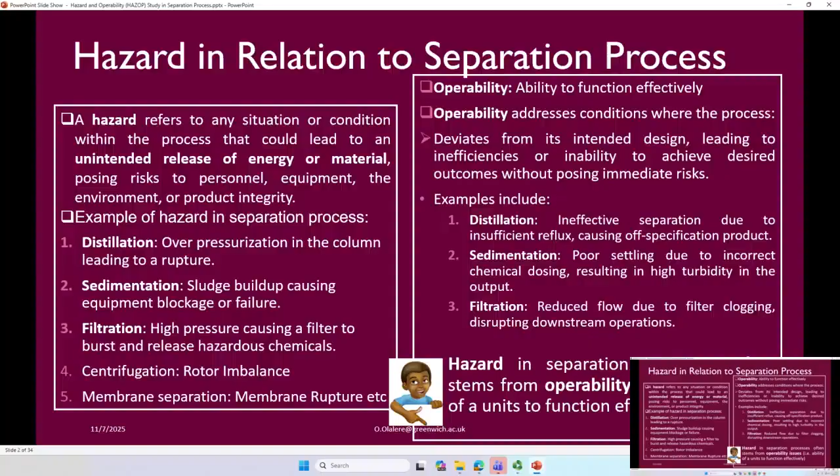Wait. Most of those things we buy, do you know the reason why they always have a manual? They will tell you, don't expose this to sunlight.

So most times, operability has to do with something that is embedded in our design. So by the time you are designing a sedimentation unit, you need to tell me what are the potential operability issues that will happen in your design.

And how can you prevent that issue from happening? So for us to prevent any hazard from happening, the first thing we need to take into consideration is to attack the operability issue first. And that is where prevention is better than cure comes in.

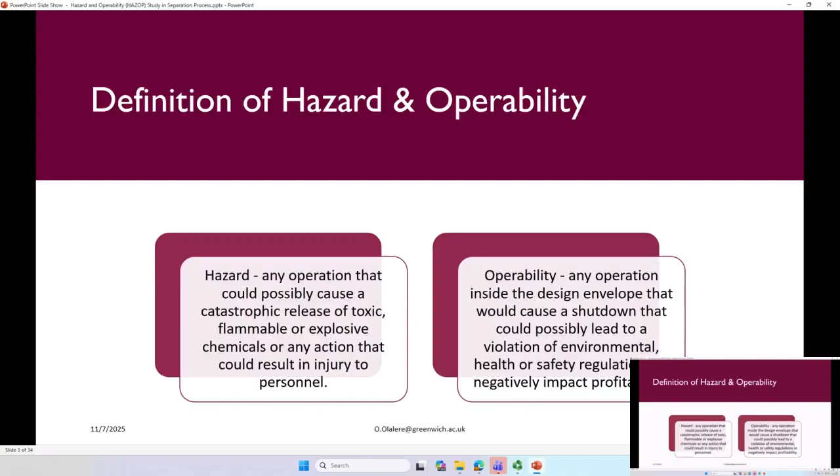You have a manual, right? And the manual tells you, don't exceed this temperature. Or in road safety, they will tell you, don't exceed, if you're on the highway, I think the highest speed is, I think 70, is it 70? Yeah, or 70 miles. Is it 70 kilometers per hour? I can't remember, 70 miles. But if it is the normal road, it's 60, right? No, except if they put 40, 20, at least 60.

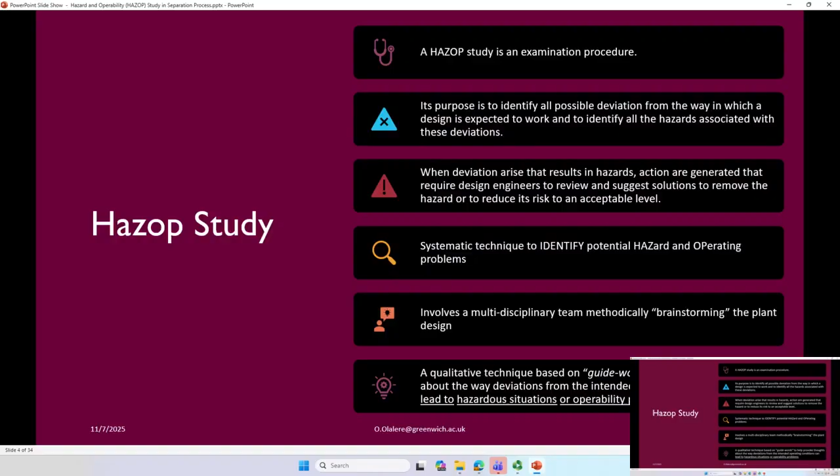Susaya, what happened? Did your salary enter? You're most cheerful today, or are you watching a movie? Don't tell me that's the reason why you're laughing. No. Okay, don't worry, I hope to see you laugh during the exam.

So now, what you're saying in essence is that we can conduct a Hazop study during the design or installation of any new plant. Like now, we are designing different equipment, right? So this is when you can use a Hazop study. So under your environmental and sustainability work, you will add Hazop study to it. Don't worry, I'll tell you how to do it, it's very simple.

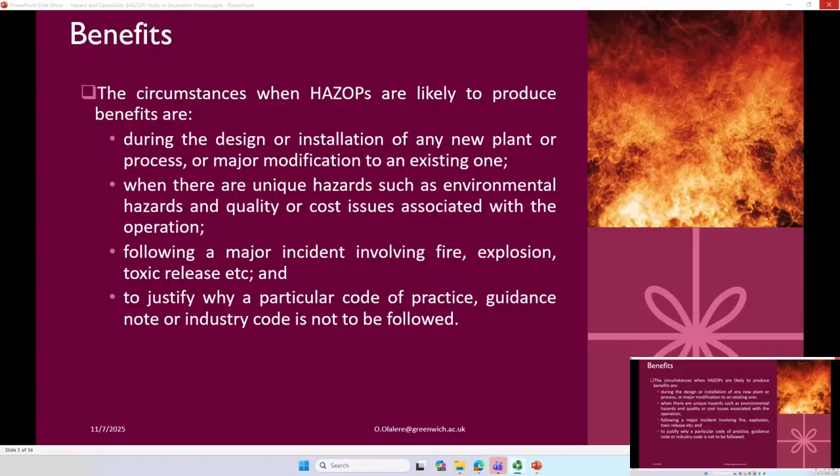So a Hazop study is most useful if we're able to identify operability problems. It's more or less like, okay, if I do this, this is what will happen. It hasn't happened yet, right? If I don't read my book, this is what will happen. If I delay in applying for my visa, I will overstay.

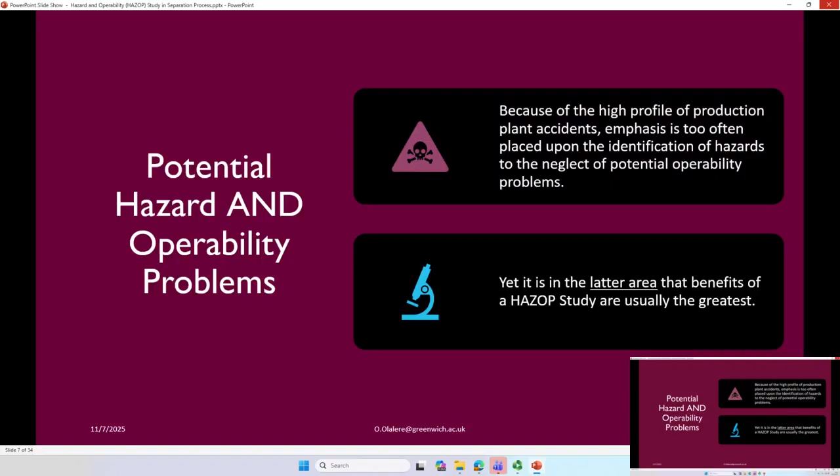So that's an operability problem. If I switch on this, what will happen? The pressure will increase. And if the pressure increases, maybe my filtration system's filter will break. And if the filter breaks, what happens? It's possible we have a release of toxic materials, and maybe a cost issue too.

So when should a Hazop be held? I think I mentioned that. Now we have different terminologies. Please, this is very important. If you are a safety officer, you need to know all of this. Not many people know this, but if you're a safety officer, you need to know it.

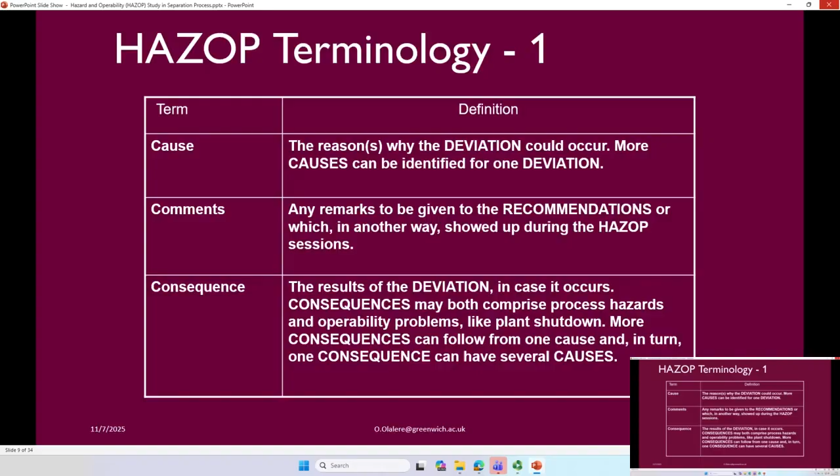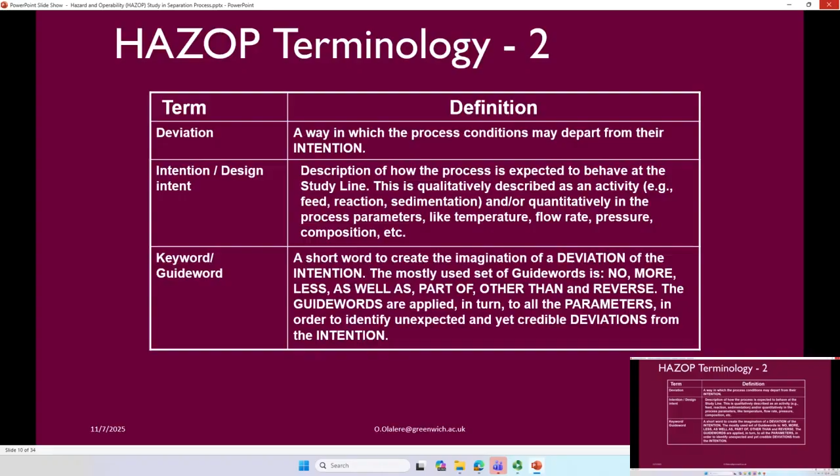Then we have parameters, the relevant parameters for the condition of the process, like temperature and so on. We have study line or node, a specific location in the process where a deviation occurs. So if the deviation occurs in, say, a separation unit, we call it the node. They may ask, can you show me the node? The node is that place where the accident occurred. Then recommendation: activities identified during the Hazop study for follow-up.

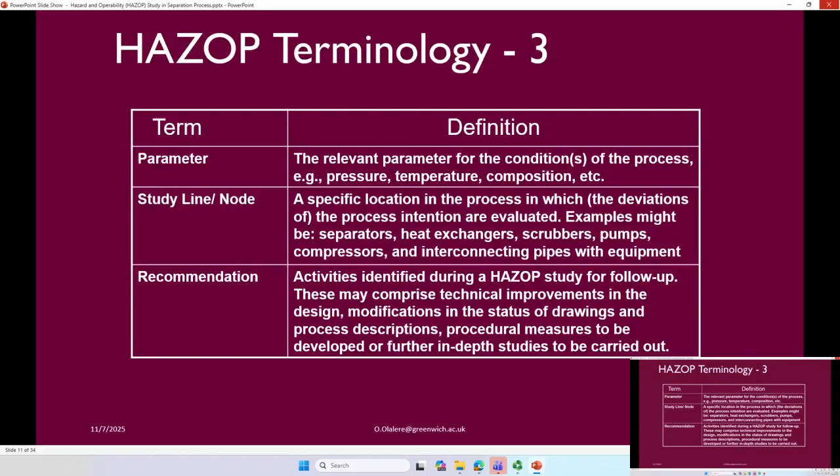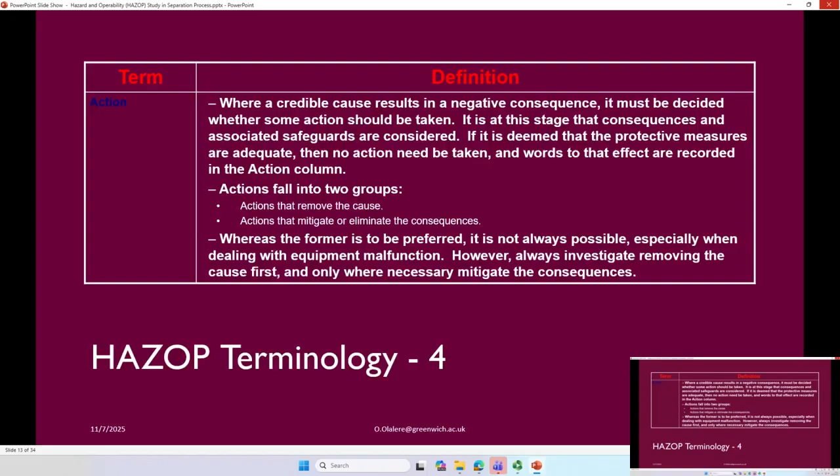Safeguard is what helps to reduce the occurrence. The action is where a credible cause results in a negative consequence, and it must be decided whether some action should be taken. So that is Hazop terminology.

Now, in any Hazop study, these are the major contents. You may not appreciate all this now until you get into it. Do you have any safety officer here? Mukunda?

I think you've done something on this before? Safety officer, I did an HSC course. HSC. Did you do anything like a Hazop study? Yeah.

Jyoti, did you do anything like this? I used to be a safety officer. Okay, did you do a Hazop study? Yes, we used to do a Hazop study, material safety and design safety. She has a certificate, right? You have certification too? No. Messiah?

I think you understand it more because you've done this before, but I'm just giving you a generic Hazop study. There are different Hazop studies specific for different issues. For example, we'll do different examples in this class together, and you'll see how we can use Hazop study in separation units.

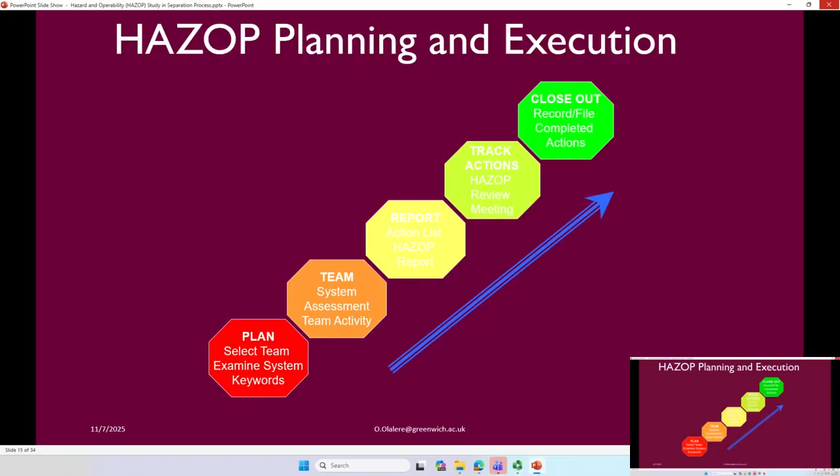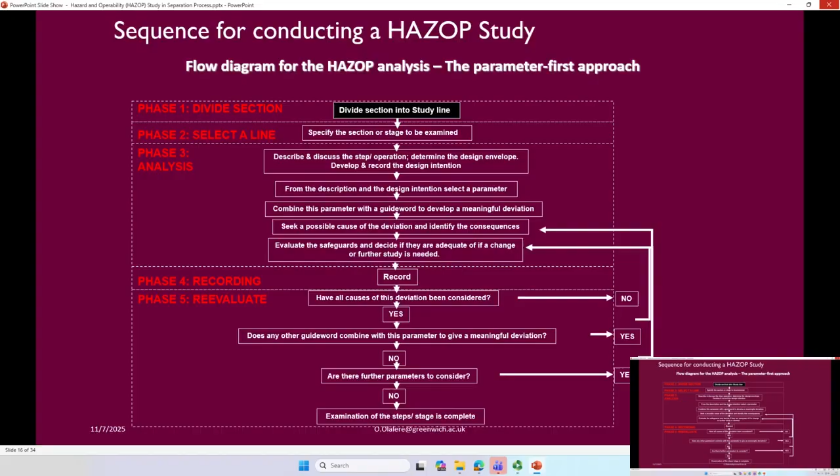So now the first stage is planning. Second is team, report, track action, and closeout. These are different stages. Now, the sequence for conducting a Hazop study - this is just a sequence, you don't need to cram it: divide into sections, select a line, analysis, recording, reevaluate.

Then, how to perform Hazop on a provided example. The first step is to prepare for the Hazop - don't worry, we'll do one or two examples on this. Include the process engineer, safety specialists, and so on. Then collect the P&ID or process diagram, equipment, data sheet, and so on.

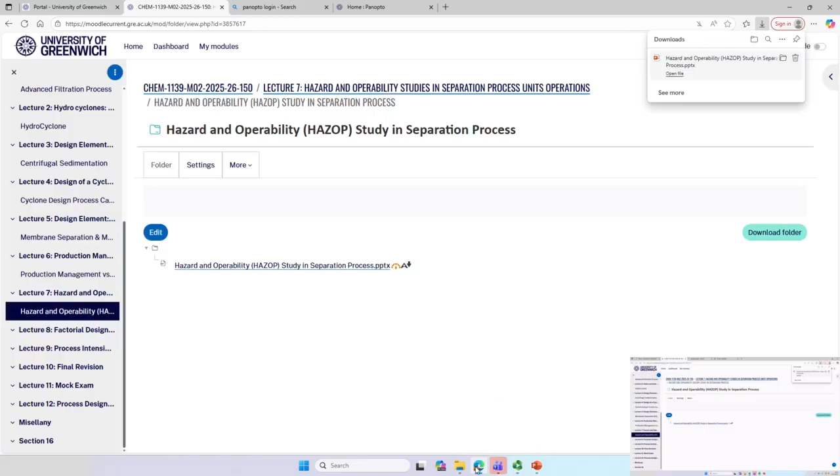Listen, I only ask you to design a process, Jyoti. I only ask you to design a project in which a particular separation unit is being used. Okay, take for instance, let me re-explain. Please listen. So look at this. What's wrong with you? Now look at this cyclone, for example.

You have been tasked to design an industrial scale air cleaning system for a cement manufacturing plant. So this is a process, you understand? But the calculation I want to see is your design calculation, based on that separation unit we do in class - like mass balance. The mass balance will be based on that separation unit. For example, for design of centrifugal sedimentation, the calculation will be based on centrifugal sedimentation.

But don't forget, a pump will be there, maybe pumping into this, and the rest like that. There may be a storage unit - that one I don't need the calculation for. So I only need the calculation for everything that is entering that separation unit. It's a process I want you to design, but you are trying to amplify that particular separation unit.

Not just that you give me this and say, okay, I design this - no. What are the other processes involved? Because they will challenge you when you are presenting this. I'll be looking at you and smiling.

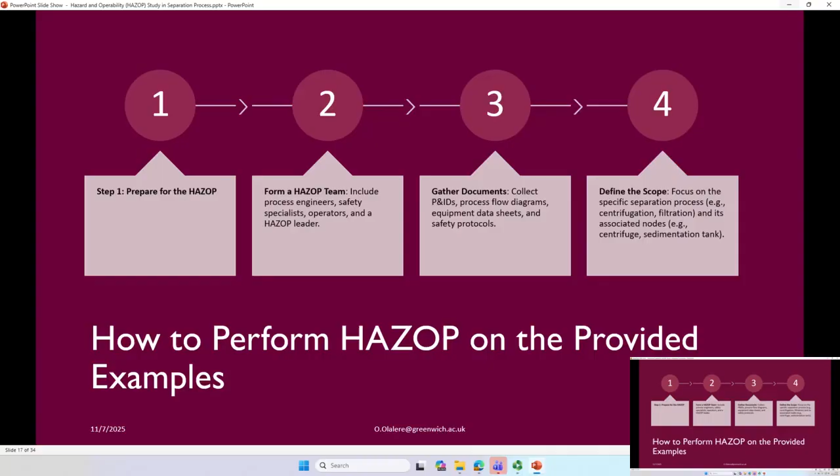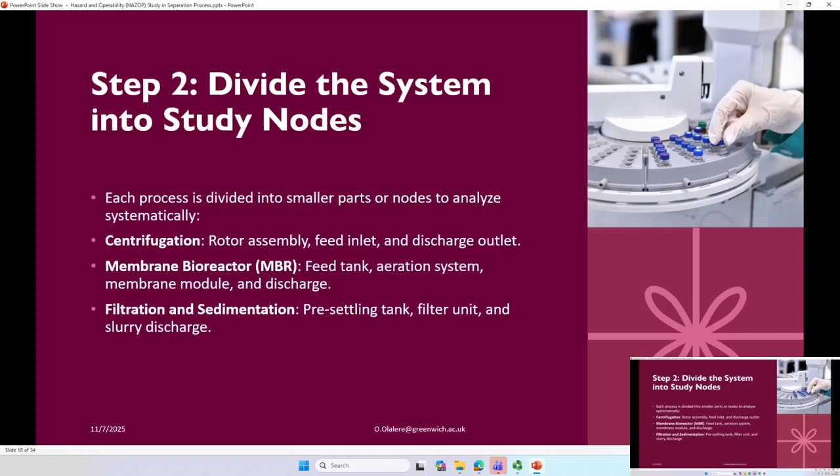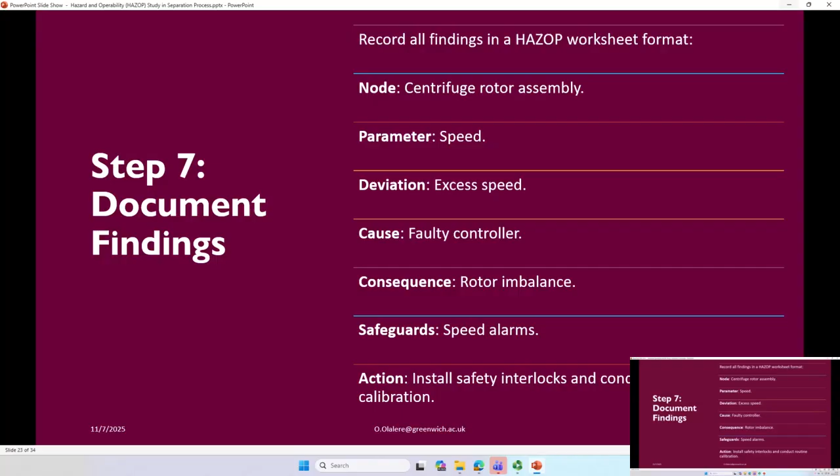So now, how to conduct or perform Hazop? Please listen, you can finish your group meetings after. So how to perform Hazop on a provided example? The first step is prepare for the Hazop, and so on. The second is divide the system into study nodes—each process is divided into smaller parts or nodes to analyze them systematically. Then centrifugation, like rotor and so on—don't worry, we have an example here. Then apply guide words, these are different guide words, and identify safeguards. The last step is recommend actions, then document findings, follow up implementation. Now let's look at this.

A chemical processing plant uses a reactor to produce a product by mixing two reactants A and B. This is—what's the name? It's an exam, a possible exam question. So the class is quiet now. A chemical processing plant uses a reactor to produce a product by mixing two reactants A and B. The plant has reported an incident where the reactor temperature rose significantly above the design limit, leading to an emergency shutdown.

So this Hazop study is after an incident occurred, right? During the investigation, it was discovered that the temperature control system failed, and there was no adequate backup system in place. This posed a risk of thermal runaway reactions, potentially causing an explosion. So you are being asked to conduct a hazard and operability study on the reactor operation to identify potential hazards and suggest suitable solutions. First, conduct a Hazop analysis for the following parameters: temperature, flow, and pressure. Second, propose one preventive measure and one mitigative measure for the identified hazard.

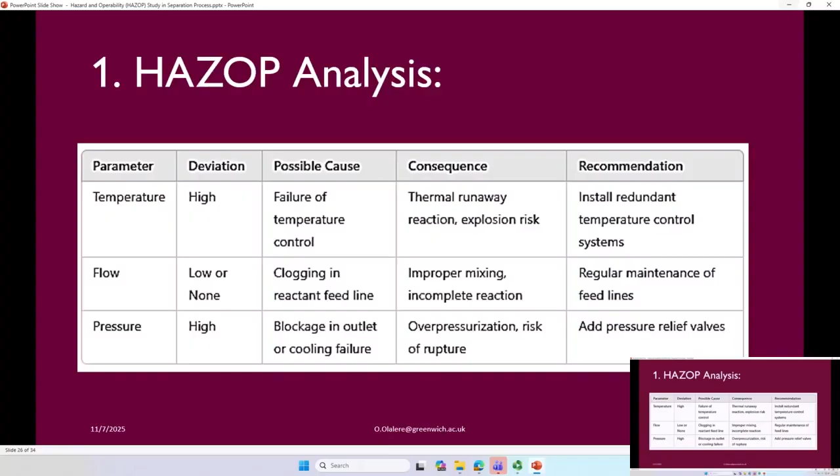Now, the second question says, propose one preventive measure and one mitigative measure for the identified hazard. Preventive measure, very simple, we are repeating it. Install a redundant or independent temperature control system to ensure continuous control. Even if one fails, you have a backup on the redundant one.

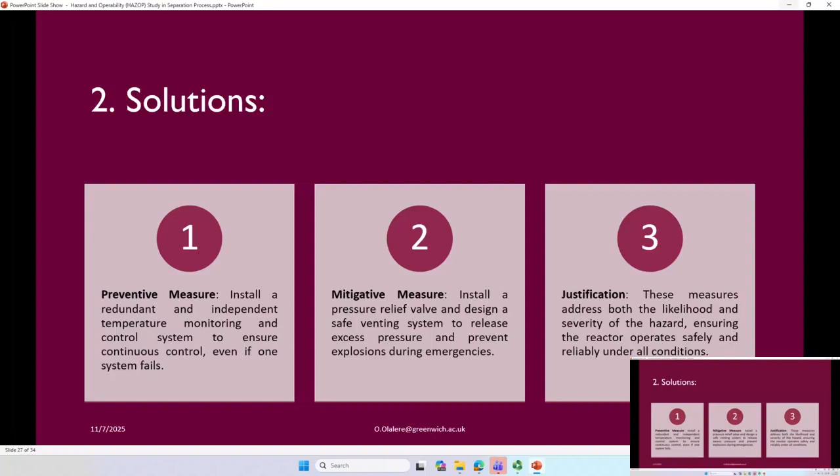Then the mitigative measure: install a pressure relief and design a safe venting system to release excess pressure and prevent explosions during emergencies. And what is the justification? This measure will address both the likelihood and the severity of the hazard, and it will ensure the reactor operates safely and reliably under all conditions. That's it about that question. The second question: a water treatment plant with a chlorine dosing system to disinfect water.

During an operational review, it was found that excessive chlorine was occasionally being dosed into the water due to pump calibration errors, posing risk to downstream users. The Hazop study is required to analyze the system and propose solutions to prevent such occurrence. Now, perform hazard analysis for these parameters: flow, concentration, and pressure.

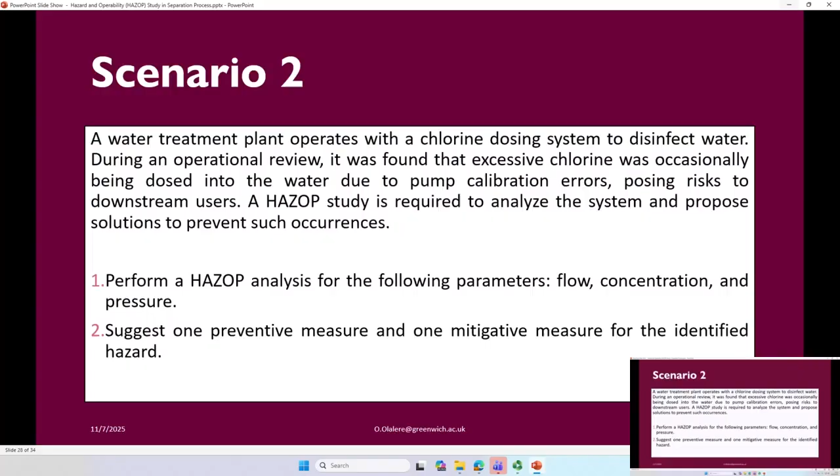Then the same question. So the only thing that will happen is that we can have different scenarios, but it's the same thing. So if the flow is high, just as the one we had the other time, pump over calibration, excessive chlorine dosage, all those things are inside the question, right? Then the recommendation is from you now. So all this, you can actually get inside the question, right? The only thing you are adding to it is what? A recommendation. It's very simple.

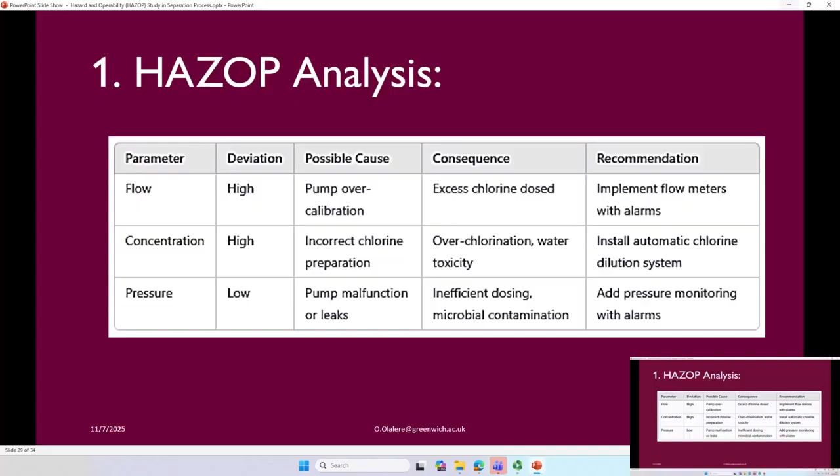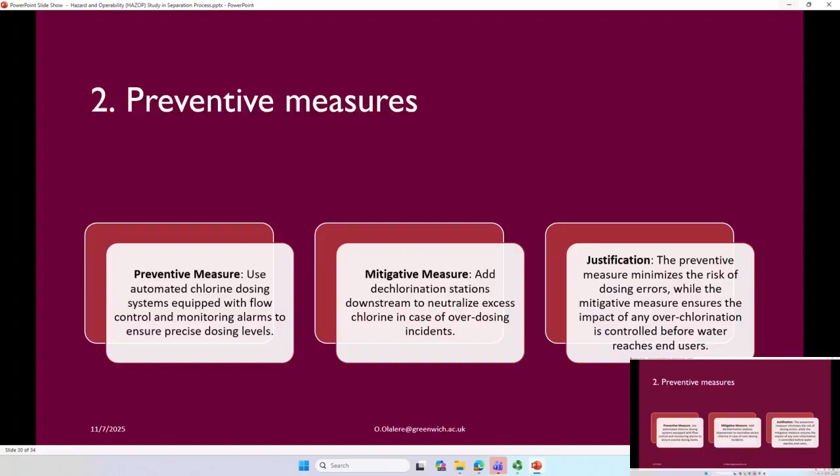Preventive measure: you can use an automated chlorine dosing system equipped with flow control and so on and so forth. The mitigative measure: add dechlorination stations downstream to neutralize excess what? Excess chlorine. And then justification, preventive measure and so on. So that's it about that. Can someone do this for us? Can someone do this for us?

Conduct Hazop analysis for the following parameters. Harris, read for us. A petrochemical plant operates a distillation column to separate a mixture of hydrocarbons into light and heavy fractions. During routine operations, the plant experienced an unexpected increase in pressure within the distillation column. This led to the activation of the emergency pressure relief system, which vented valuable hydrocarbons and posed a safety risk. A Hazop study is required to analyze the process and propose measures to prevent such incidents.

Now, conduct a Hazop analysis for the following parameters: pressure, temperature, and level, and propose one preventive measure and one mitigative measure for the identified hazard. Solve it, Ali. Ali? It's your turn. So in this scenario, the pressure went too high, due to which the emergency pressure relief system activates. So temperature also gets high, and level.

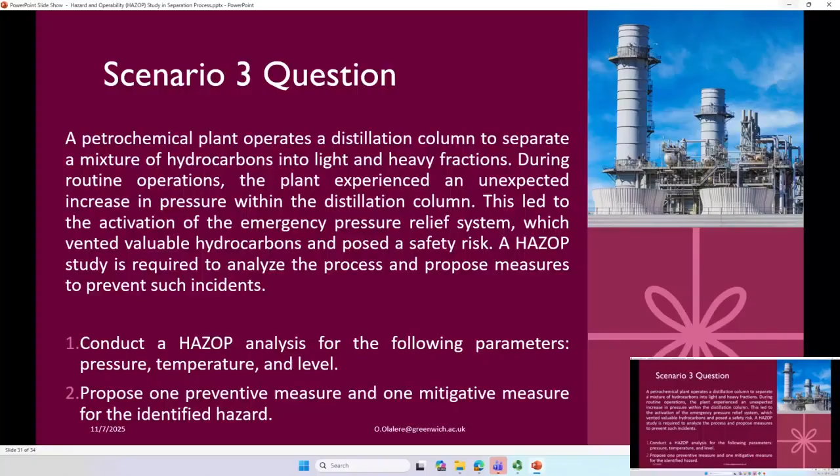I'm listening. Malini, what's the solution? Conduct Hazop study. Solution for how to conduct Hazop study? For this problem. So that's the last problem. I say if you like, just check for me. What's the solution to this?

Conduct the Hazop analysis on pressure, temperature, and level for this distillation problem. For the pressure, the deviation can be high pressure, and the possible solution is to put pressure relief valves. Good. Then for the temperature, I feel like we can use redundant temperature sensors. Okay, it still makes sense. What about level? Level indicators. Okay, that makes sense, right?

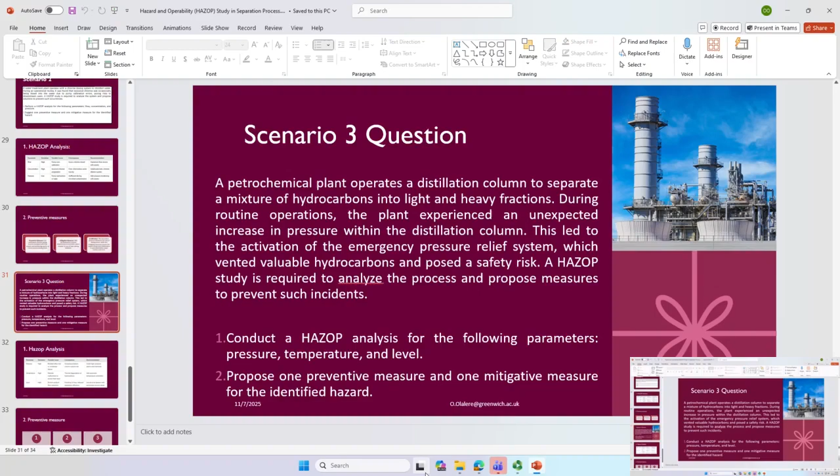So pressure, you're right. Blocked reflux, the same thing. But the only issue is the recommendation. Please listen. For the recommendation, install a high pressure alarm, so that when the pressure is high, it will alert. Then for temperature, you can have an automatic temperature controller or an AI controller. Then for the level, you can include level sensors, which many companies have, with an automated control valve.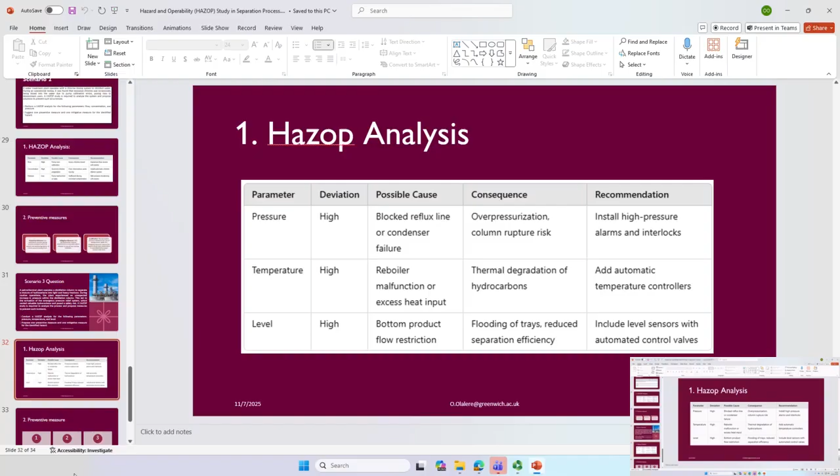Now, group 1, stay here. Group 2, stay here. Group 3, stay here. I want to know what you have done so far, if there's any problem. All the meetings you want to have, it's time to do it now. I like the template you got. Group 2? Priyanka, group 2. Please discuss for 15 minutes. I'll come and meet each group.

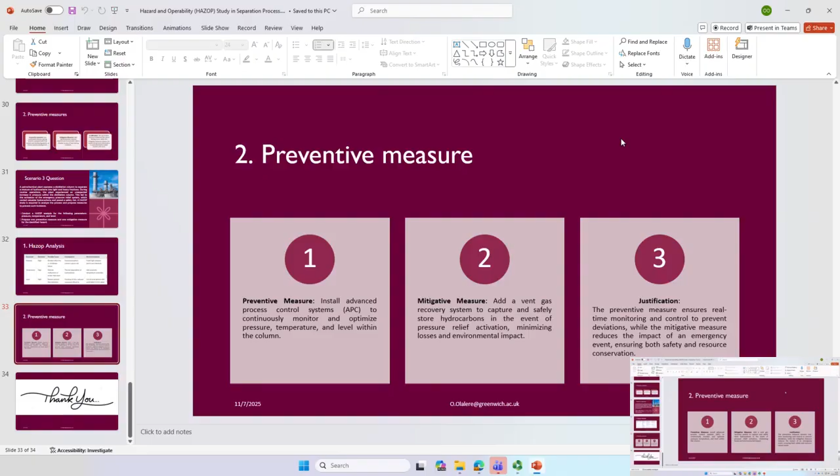Which group is this? Go and meet your group early. Different processes. Osmosis, some other process like sedimentation. We should include that. That's what he was mentioning. And maybe you discuss what you have each done. Not only that, other things.